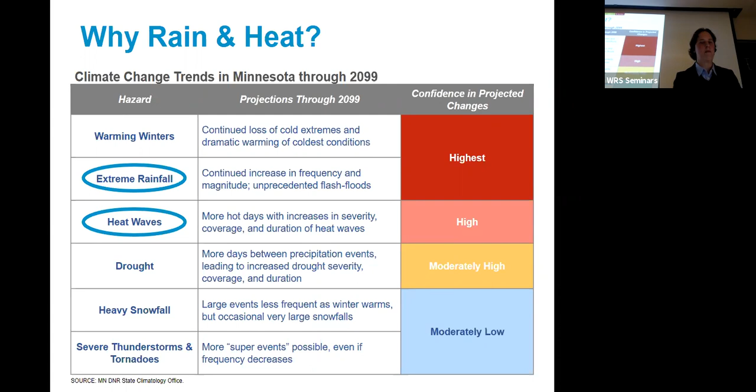So I am just talking about localized flooding. Someone else worked on heat, and if you're interested in heat, I can definitely put you in touch with somebody to talk about that. But so, flooding.

We all think we know about flooding, but I'm just going to take a step back to the basics. Types of flooding: we have riverine flooding, which is when extended rainfall or snowmelt causes a river to exceed its capacity. These are the big floods we see. This is St. Paul, I think in the spring, the Mississippi and St. Paul. This happens almost every spring, sometimes in the fall, on major rivers. And this is what FEMA floodplains do a pretty good job of covering what the hazards are.

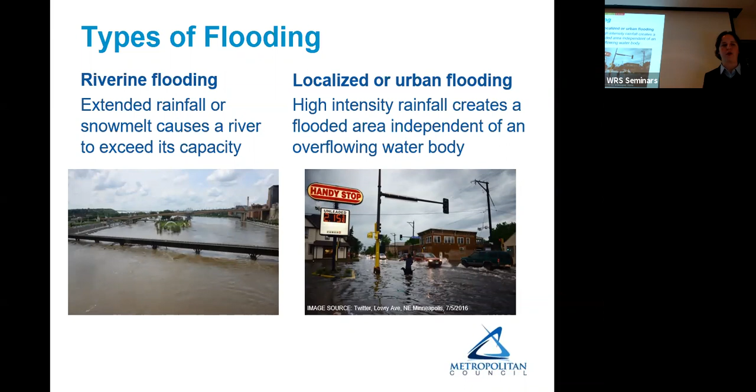But in our state, there's also localized, or you'll sometimes hear it called urban flooding, which is when high intensity rainfall creates a flooded area independent of an overflowing water body. So let's dive into that a little bit more.

This localized flooding is almost always caused by overwhelmed drainage systems. By that, we usually mean storm sewer systems. For any city, county, MnDOT, their storm sewer is designed to have the capacity for some rainfall event. Could be rain that occurs every 5 years, every 10, or every 25. MnDOT especially designs their newer storm sewers at low points to be the 50-year event.

So there's a lot of danger in highways flooding. We go at very high speeds, so they really want to avoid having highways flood. So they designed to a 50-year event. Some of Minneapolis's older systems may not even be able to handle a 2-year event. So it really depends on the age and situation.

But regardless, intense rain events can overwhelm any of these systems. If MnDOT's designed to a 50-year, when we get a 100-year, it can't handle it. It may only pond a little bit, but every single storm sewer can be overwhelmed. And the key here is that these are likely to become more frequent. We've seen them for as long as we've had storm sewers, but we're seeing them have greater flooding and more often. And we really felt like this was an under-acknowledged risk.

We started this project like 3.5 years ago. There actually have been a number of papers, and some universities have been doing more research on this urban localized flooding, but when we started, there wasn't a lot of documentation on it. The council's systems, I think, are fairly designed with the FEMA floodplain in mind, and I think communities also tend to design their roads without putting houses in the FEMA floodplain. But they don't necessarily think about this localized flooding when they're designing or operating their systems. So that's why we dove into that a little bit more.

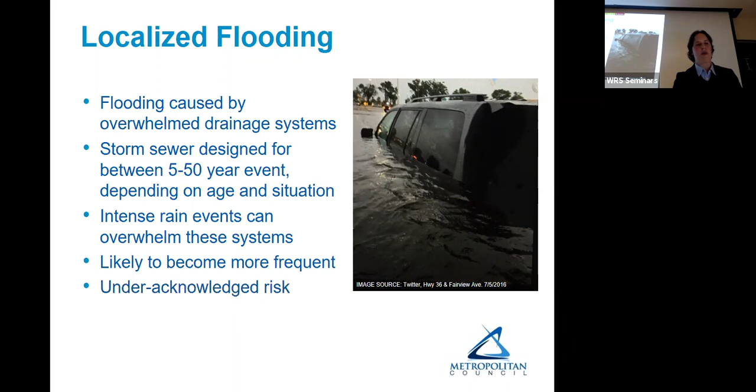Wanted to show an example of one of these. This was from this summer, July 16th. This is a map that shows, this is Minneapolis, downtown St. Paul is over here, we are here. The red areas got more than 2 inches of rain in 1 hour. Probably the St. Paul campus got somewhere a little bit less than 2.

I was at a doctor's appointment over here on the East Bank, and I had to stand in the lobby for an hour while torrential rain came down, solid for an hour. It was amazing. This area is on Lyndale in South Minneapolis, and this other area is out by St. Louis Park. What's really important to note is this area got 2 inches of rain in an hour.

This area got no rain in an hour. I looked at the Minneapolis-St. Paul Airport, which is right here. It got 0.03 inches. So we're talking 2 inches to 0.03 over a 3-mile period. We often use the weather from the Minneapolis-St. Paul Airport as a surrogate for rain or wind around the metro.

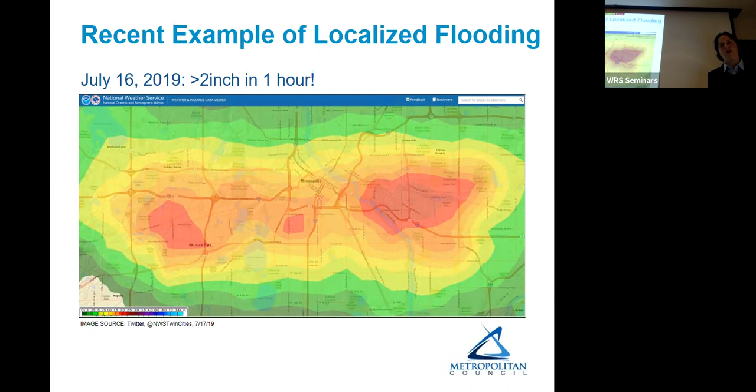And this is where it shows that we really need local information, because the system just came out of nowhere and it just stalled. So do you think there was any localized flooding from this rain?

There was. This is just an article that was in the Southwest Journal, and I have some better photos in a minute, but it shows flooding right by Hum's Liquor at Lyndale and 22nd, and it was about thigh high, so 3 feet deep probably.

Here's somebody trying to bike outside the wedge. I would not have done that, but they look fine. And then this is Garfield and 22nd, so I'll show a map later, but around the corner where cars were floating. And if you guys do anything with weather and current events, Twitter is the way to go. You find the coolest photos on Twitter for stuff like this.

And then also over by that St. Louis Park area, this photo is from Highway 394 at Penn. So that's on 394 where cars are used to going 60 to 70 miles an hour and the water's at least a foot deep. And that's where we're really talking about dangers.

So we know from the State Climatology Office we're going to get more of these events. And these photos show us that these events, well, they may not be the Mississippi River flooding, but they are dangerous and can cause a lot of property damage. So what we'd like to know is: are there locations where they're going to happen more often, and are there ways that we can mitigate that?

But there are some challenges to understanding these kinds of flooding events. In the Twin Cities region, we don't have comprehensive storm sewer information. Storm sewer information tends to be held by cities that keep it separate, and then MnDOT has their own storm sewers, counties have their own storm sewers. Those systems don't talk to each other very well.

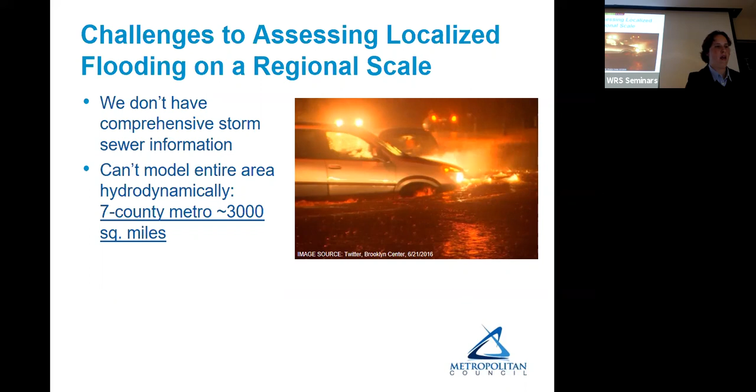So the approach we took is based on a Danish road directorate method. It turns out the Danes are much more advanced in terms of looking at this kind of flooding. And it uses a digital elevation model, which, if you don't know what that is, it's a GIS model that shows the elevation of the ground at any place on Earth. And this method uses GIS terrain analysis tools.

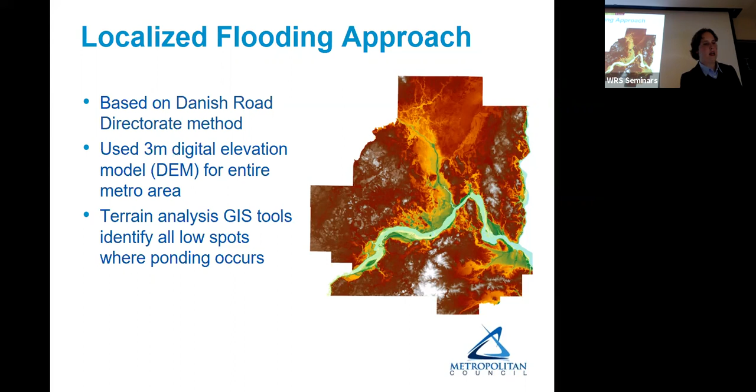I used ArcGIS to identify basically all low spots where ponding can occur. As an aside, I don't know if you guys are all familiar with the Minnesota LiDAR initiative. LiDAR is light detection and ranging. In this case, you fly a plane over some land, shoot many light beams at the ground, it reflects, and based on that reflection you can tell the elevation and also some things about that land. I actually used it for my master's project to look at trees.

The state spent a lot of money and effort gathering LiDAR over the entire state from 2006 to 2012, when they processed this data into a number of products, including a statewide 1 meter and 3 meter DEM. So that's really valuable information, and we wouldn't have been able to do this without it.

The previous DEMs were usually at the 30 meter scale, and when you're thinking about flooding in roads, 30 meters doesn't work. So the 3 meter DEM was key. Make use of that data if you're not already.

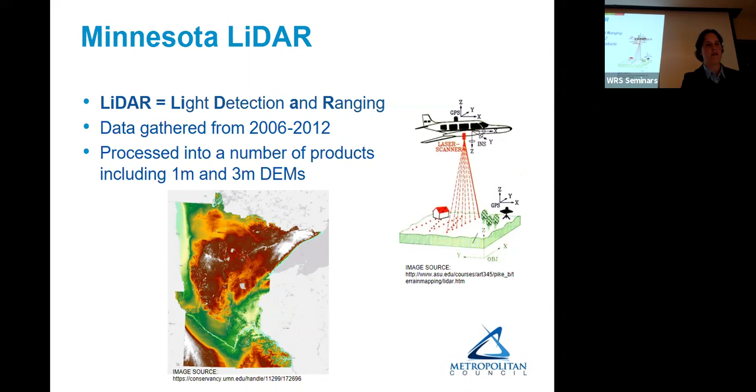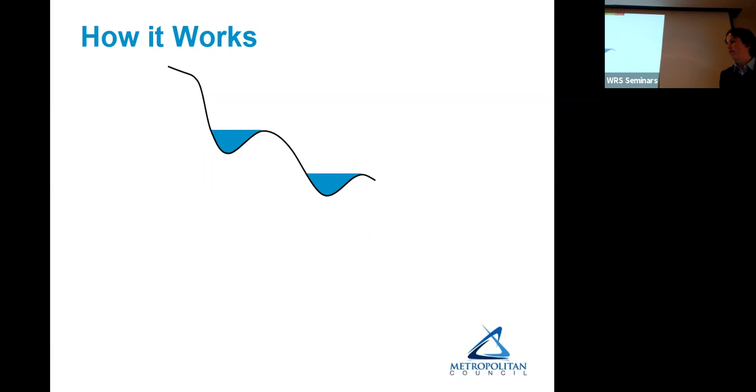It is being updated. So how does this localized flooding method work? It's pretty simple. If this is a profile of the landscape, there's some valleys, some hills - that's the DEM. These GIS tools basically fill up each of the low points until they overflow down to the next low point. It just has a method where it fills that with pixels, and then we get a map of all of those.

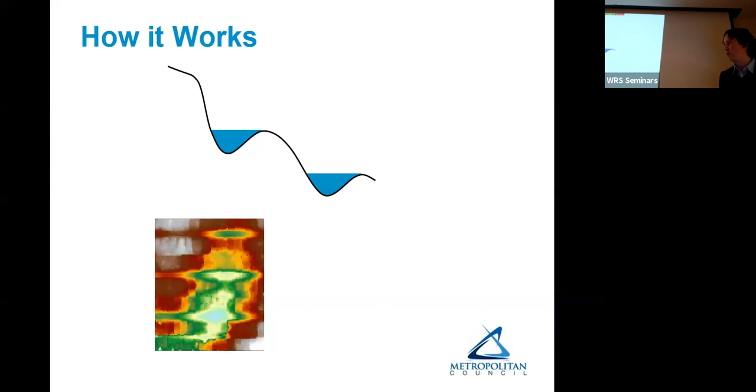So if this is a DEM, part of the 3 meter DEM with a couple of streets, that light colored blue in the middle is the low point. The localized flooding map looks like that - it just fills in each of those low points. These are called, the Danes named them Bluespots, so I'll use that term. It's very scientific.

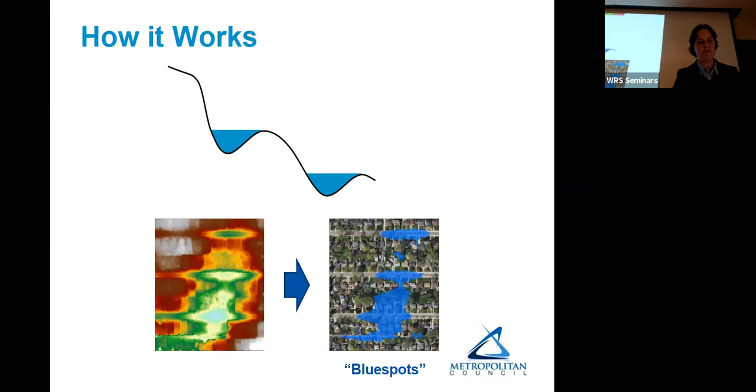So we have this Bluespot map for the entire metro - all these just blue dots.

But we really want to look at risk to our systems, and every part of a Bluespot is not equal. Depending on where you are in that low point, it may flood more frequently and it may flood deeper, so the consequences are really different. Just identifying a Bluespot and saying this is a risk is not very helpful.

This Bluespot is in Eagan, which is a really prairie pothole area of a lot of hills and valleys, and it's 2.1 square miles and 70 feet deep at its deepest. So if you were to tell, and there's highways in there, malls - if you were to tell a shop owner you're in a Bluespot, it might flood someday. If we can fill up 2.1 square miles at 70 feet deep, which will never happen, it's like a biblical flood times many, that's not helpful for them to know.

But there are parts in that Bluespot that are local depressions, or the deepest part, and they're actually maybe likely to flood more frequently. So we needed a way to go within the Bluespot and understand what has the highest and lowest risks of flooding.

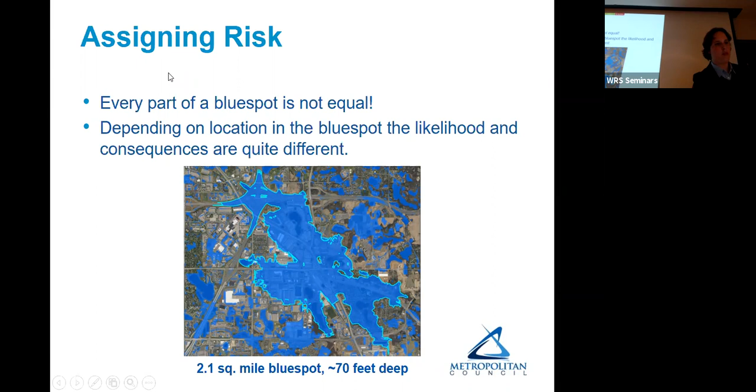Part of how we did this is we thought about the assets that the council is interested in and what depths of water are really going to be a hazard or harmful to those assets.

When we think about council assets, some of them are like bus stops that are very human, pedestrian focused, and if a bus stop is under a foot of water, that's going to be a really serious big deal to the people who want to take the bus. But that 6 to 12 inches is not as big a deal for bus routes, which could probably get through 1 to 2 feet. So we wanted to come up with a way to divide these Bluespots that we could use to look at these 6 inches, 12 inches increments.

What we did was we assigned a relative risk within the Bluespots based on the likelihood and consequences. We came up with 4 flood hazard categories: primary, secondary, and tertiary, and then something called shallow. So how it works is...

If you start with the Bluespot at the very bottom, this would be the lowest point in that Bluespot. The water, when it starts to rain, it'll start filling there, so it's 0 feet. As it keeps flooding, it gets wider. That part of the Bluespot that will flood when the water is 0 to 2 feet deep is what we call the primary Bluespot - that's what floods first, and what's going to flood deepest.

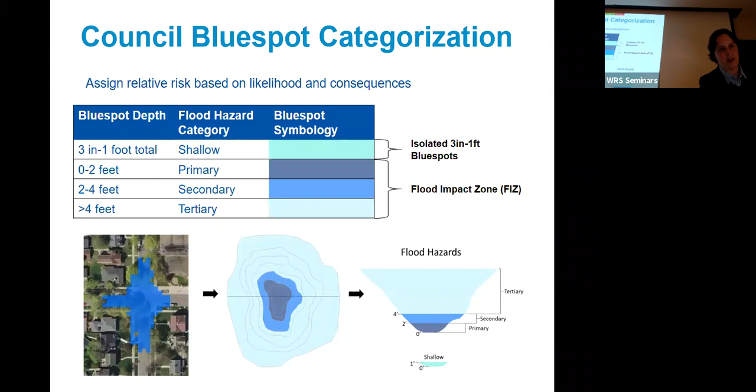So that's how we divided this up. Going back to our July 16th example, we had Lyndale and 22nd right there, and the other one was Garfield and 22nd. You can see both of those are within the primary blue spot.

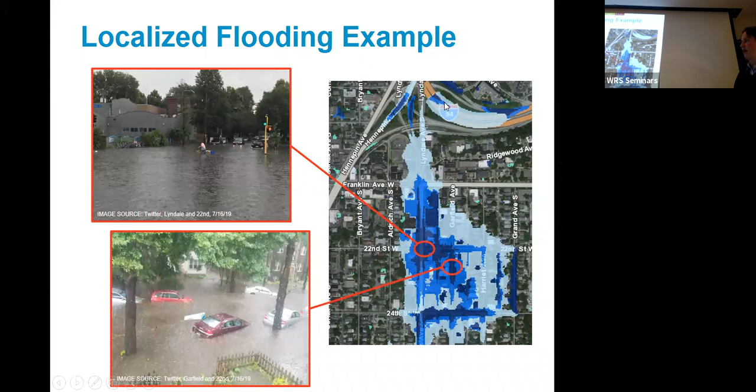Based on the pictures, I think that flooded about 3 to 4 feet deep, so that probably means it flooded somewhere in this intermediate blue area. This blue spot has a maximum depth of over 13 feet, but to get that deep, it would have to fill all the way up to 94. That's unlikely to happen, so there's some ground truthing to our method.

There are a lot of limitations to this analysis, and I don't want to make light of those. It's not based on any rainfall amounts, and it does not account for any stormwater infrastructure. It's basically a worst case scenario: it starts raining, here's a low point, it rains, fills it up, and then it overflows.

Those low spots are all gonna have storm sewer. Based on the landscape, it's really gonna depend on the landscape, and the shape of the low spot are really gonna determine what rainfall events fill it up to different depths.

So there's that, and then as I showed you, the elevation data in the Twin Cities is also from 2011. That's getting older every day. There are parts of the cities, especially parts of the urban core, that aren't changing very much, but for instance, along the Green Line on University, the LiDAR was all flown before that happened, so the DEM in that area is not very accurate, and this analysis then is not very accurate.

There is an initiative at the state to update LiDAR. They're basically right now writing a business case. They're going to start interviewing contractors, and they're hoping to have the entire state flown again by 2025. So I'm very supportive of that, but it costs a lot of money, and that shows that they're not able to do it very often.

Another limitation is that those flood impact zones I showed, the primary, secondary, and tertiary, they're really based on what was useful for the council. Another community or organization trying to use this data might want to divide that blue spot up differently. So what we like to say as a disclaimer is that this data is really used for high-level screening and prioritization, and should be considered where potential vulnerability may occur to flooding.

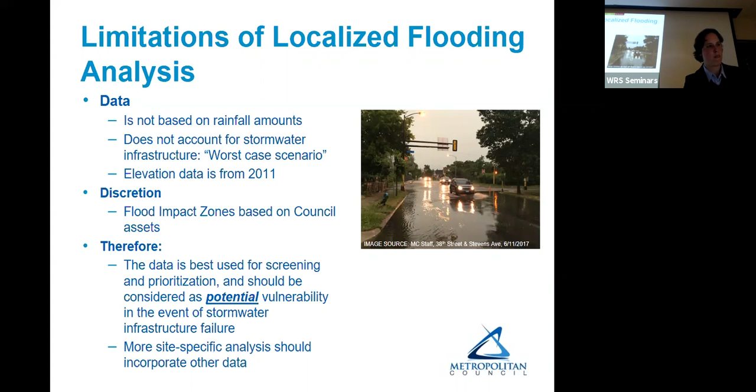So that's our screening tool we developed to help us look at assets. What does this process look like?

The council, as I said, has its finger on a lot of different systems in the metro. We own and operate a small amount of housing, quite a few facilities when you throw in our wastewater and bus facilities, but also like our headquarters in downtown St. Paul, all of the transit infrastructure, and our large wastewater collection system. But we also have a planning and collaboration role in land use, transportation, which tends to mean highways and bike routes, regional parks and trails, water resources, and water supply.

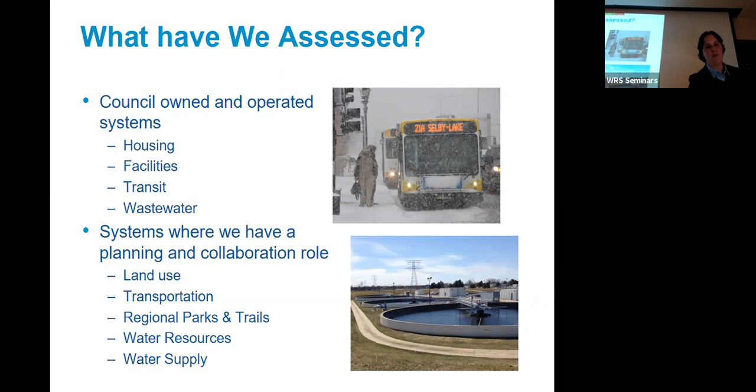So we've done some level of analysis in all of these. For transit, we've looked at bus routes, light rail commuter lines, transit stops, roadways, highways, and the regional bicycle network. I'm just going to show you some of the bus infrastructure.

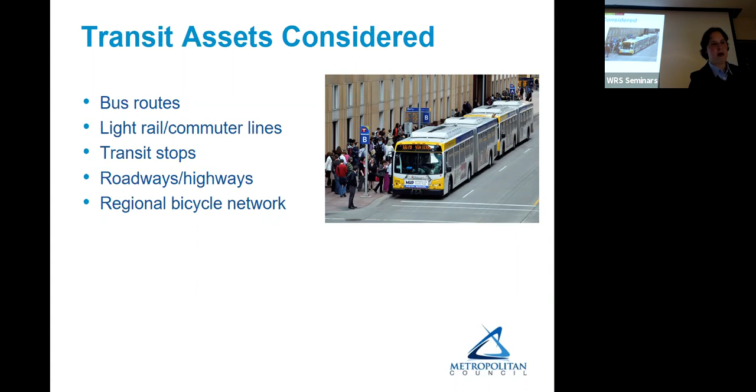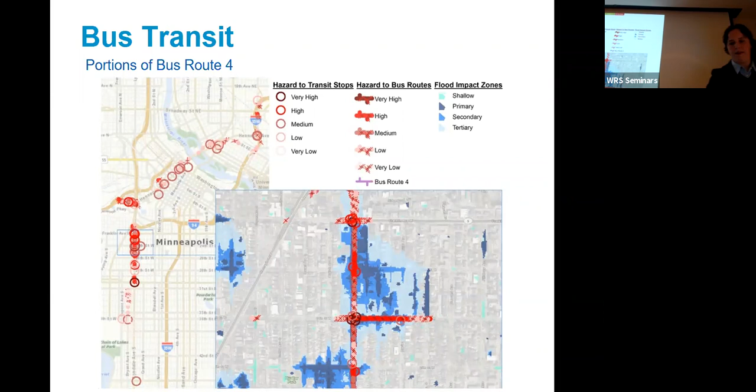We also looked at the bus routes with the highest number of bus stops in blue spots. Here's the 4, which goes up Lyndale, and it has over 90 bus stops in a blue spot. This isn't very useful for comparative purposes because every bus line is different, but if Metro Transit wants to target certain bus routes with the highest risk of flooding, this would be a good place to delve into each of these bus lines.

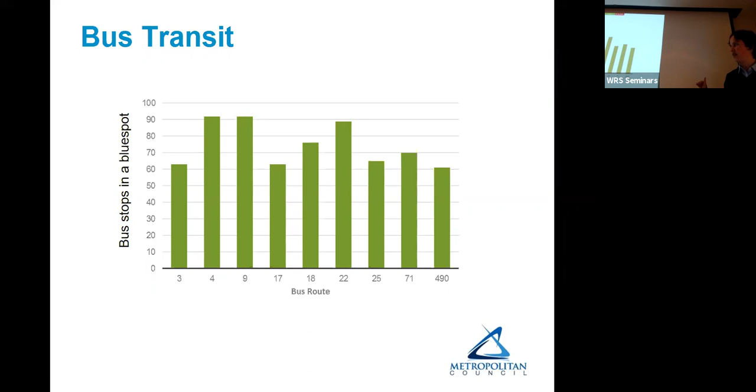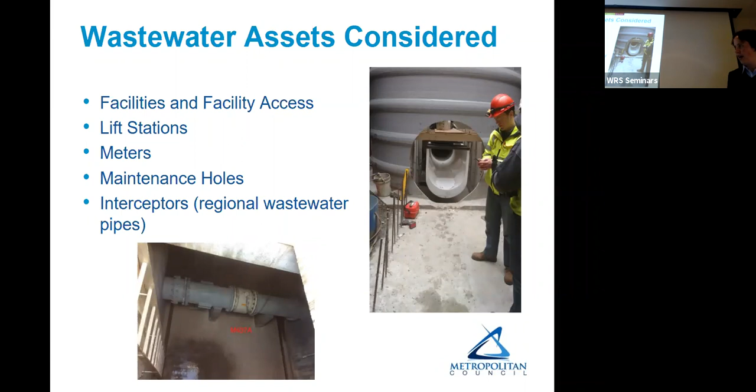One thing we were really interested in for wastewater was infiltration and inflow. Infiltration and inflow is when clear water gets into a wastewater system during flow events. In the Twin Cities, we're lucky to have separated wastewater and storm sewer systems, so normally we have pretty low flow in our wastewater systems. During high flow events, if water gets into not well-sealed maintenance holes or into privately owned sanitary sewer connections—like in my yard—the flow in our pipes can go way up. That means we often have to upsize our pipes and potentially our treatment plants to handle that wet weather flow. If we can keep infiltration and inflow low, we don't have to upsize as much. So the Metropolitan Council has been focused on reducing infiltration and inflow for at least the last 15 years, and they're always looking for ways to cut that out.

Think about a maintenance hole—usually the lid is in the middle of the street. If water ponds over that, it's just sitting there for a while, which is a really good opportunity for infiltration and inflow. There are some options to deal with that, including waterproofing solutions for maintenance holes.

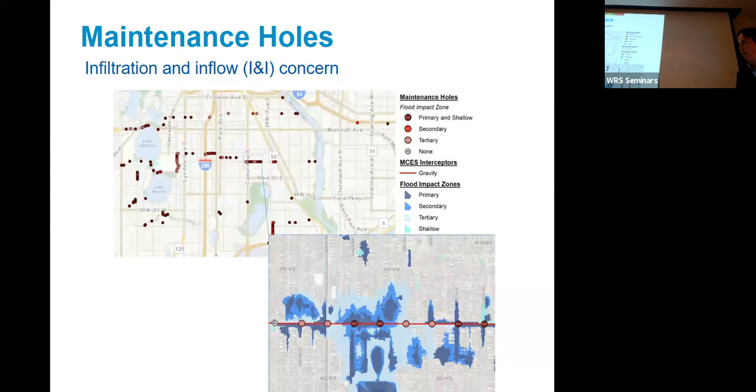So we looked at all the maintenance holes that the council has. This is on 38th Street near Cedar in South Minneapolis, and these four maintenance holes are all in a primary or shallow blue spot, where if storm sewer ever backs up, water is just going to sit on top of them. We wanted to give this list to our wastewater operators as a way to prioritize inspection of these maintenance holes, so they can come out, check if it's sealed enough, and potentially seal it to get rid of a source of I&I.

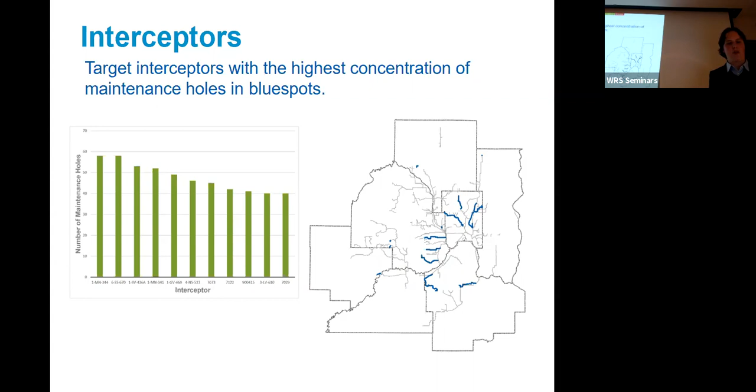We were able to look at each of our interceptors and rank them by how many maintenance holes they have in a blue spot, shown here. This can really help prioritize—if we have information that a certain interceptor has really high I&I flow, we might look at this chart and see it also has a high number of maintenance holes in a blue spot. That would put it at the top of our list to get a crew out to start looking at it systematically. We have a lot of meter information for our interceptors, and that peaking factor data could be paired with this maintenance hole chart to help prioritize.

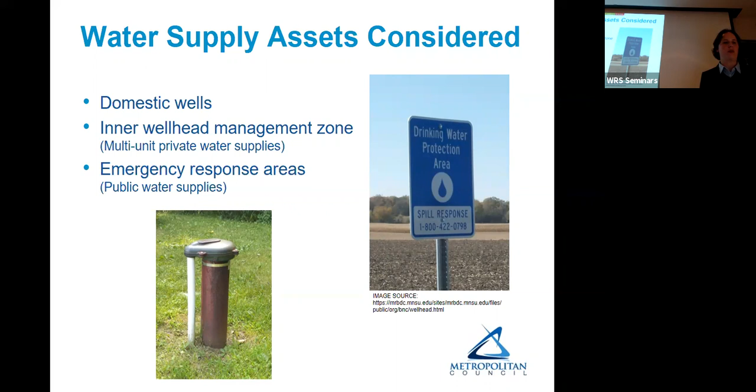And then the emergency response area, which is part of the wellhead protection area for public water supplies. An example of one of the analyses we did was for private wells. We pulled all of those off of the Minnesota Well Index and drew a 50-foot buffer around each to see which are located in a primary blue spot. The thought was that wells and the drinking water supply could potentially be contaminated directly if a well is overtopped during a flood event, or indirectly through standing water that infiltrates. So this is a way we can work with communities to potentially target inspection of wells.

I know the city of Edina is doing a very similar exercise, looking at using this kind of analysis to target abandoned wells, which are one of the highest risks to water supplies. Often a home had a well they don't use, and the home is sold a couple times. Nobody knows there's a well there. It's often cut off at the surface and not well sealed, and that would be a really easy source of contamination.

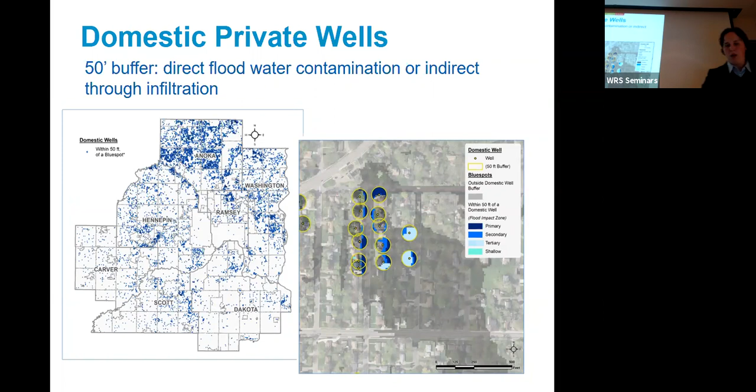So what a city like Edina has been doing is house-by-house inspections where they think there's a well, and then they seal them using concrete. It's very straightforward to seal them if you know it's there. But if you have a lot to target, one way would be to see which of these are in the primary blue spot and most likely to flood. So those are just some of the analyses we've done.

In summary, blue spots are really just the beginning, and the world is full of them—they're just low spots in the landscape. So just because an asset is located in a blue spot, it does not mean it will ever flood. We think of this tool as looking for potential flood vulnerability, and we encourage always doing more site-specific analysis if you can.

Love for you to look at our analysis at metrocouncil.org/CVA. We tried to put together tools that can be really useful to communities and partners. We have a localized flooding story map that goes over a lot of what I just talked about, walking through the method and how to use it. And then we have a flood screening map, a GIS map you can pan around, look at your house, look at something you're interested in, and see if it's in a blue spot. This data is available to download from the Geospatial Commons. It's very large, so I'd recommend downloading a geodatabase if you want to do that. That is all, so I'd be happy to take any questions.

Great presentation, really useful analysis. It seems like the next logical step would be to see where the stormwater drainages are—do you have plans to do that? We don't, because it's sort of beyond our purview to get in that deep. I know a number of cities, like Edina, have done a model for all of this stuff, so this data isn't very useful to them because they have better data. I think Hennepin County has also been using this. So for us, no, but we would encourage doing that in locations if you're zoomed in.

Have you adopted your drain? Oh my god, I know. I called it a welfare check, because I know the people who adopted the drain and they were...